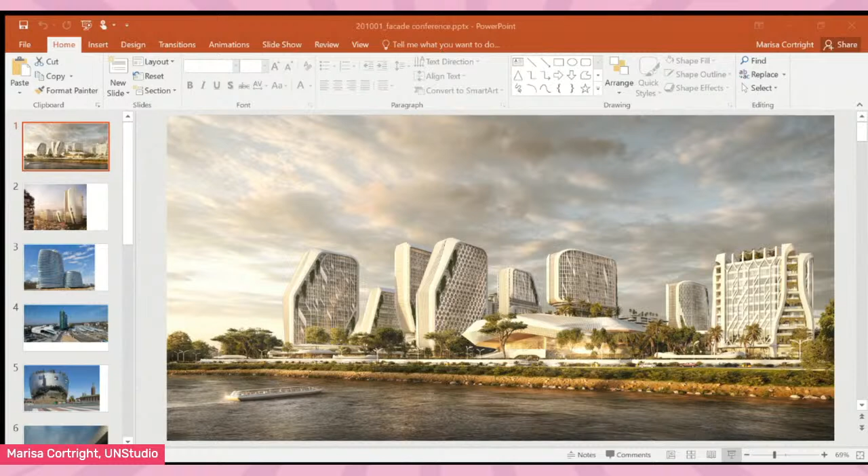We have got a glass box, which is the first skin, created for an inside-out experience. One should appreciate the fact that most commercial office buildings have an occupancy density of not less than 100 square feet a person, and some offices are as dense as 70 square feet a person. When you have so many people working out of an office space, the inside-out experience - what you can see from inside your office to the outside - is very important. So we decided as a team that the first skin has to be as transparent as possible.

Now, when you do a transparent facade, you always have to fight the forces of nature, basically the sun - we have the heat indexes, re-radiated heat. So that's when UNStudio came back and developed the second skin concept. Putting together the first skin and second skin, we are able to address the building's aesthetic appeal, make it a landmark development, and also honor all the requirements of climatic factors. So that's in a nutshell what Karle Town Centre is.

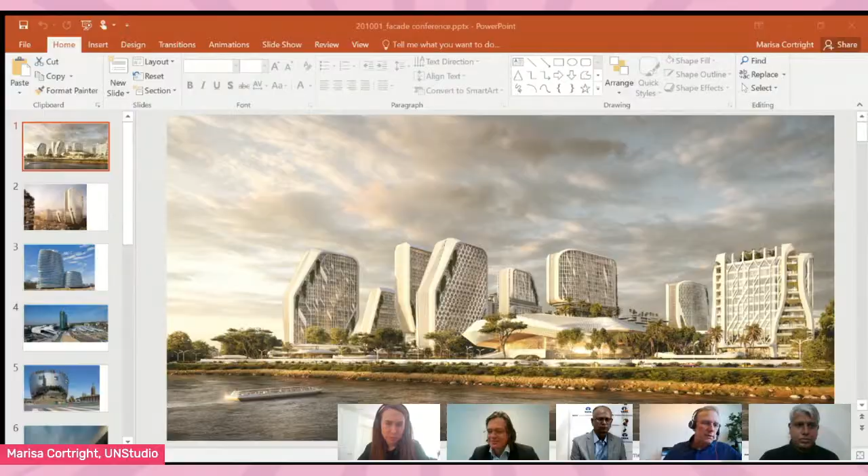I will explain a little bit more about Sorba, because we started working on metal facades. We first concentrated on producing aluminium cassette facades or stainless steel cassette facades, these kinds of facades. At that time we also looked at some other projects, but always in metal - cladding to tunnels, cladding to an underground station, cladding to bridges or whatever.

This was also the time we came in contact with UNStudio and looked at their first project, in the city of Arnhem in the eastern part of the Netherlands, where they had a tunnel to clad with a stainless steel mesh. This was the first time we came in contact with UNStudio, and we also saw their whole master plan for the city of Arnhem, for the railway station area. This was an incredible design, of which we thought, as Sorba, in 1998 or 1999, wow, this is all incredible. It would be nice for Sorba to stay with these guys from UNStudio and produce all these types of claddings required for this whole master plan.

And now in 2020, I can say that we were able to stay in contact with UNStudio, but also we stayed in contact with all the contracts that were given to the market. We won all of them, and we produced so many different kinds of claddings in this area, like the facades. Exactly, this picture is a nice picture.

We started on the two buildings in the center, where we did the complete facades, glass, aluminium cladding, etc. Later on, we did the canopies on the platforms, which you see on the right-hand side. We did complete canopies, glass and aluminium composite panels, including substructures.

Then finally, which is really the masterpiece in my eyes, is the cladding of the roof. We did the external facade of the roof, the watertight layer, the insulation, the airtight layer, and also the GRC panels on the roof, as well as some internal GRC claddings.

All individual, all unique panels, I mean, on the roof, about 1,100 unique panels in size and shape.

Incredible nice project, which also was for Sorba really a push in the development of the software we work with, and also the way of installation of these kind of heavy panels. This also brought us in contact with much more complex projects in London, for instance.

But also, through these projects, we could look at other projects. Most of them are always in Germany, Netherlands, or the UK. I think a nice example is one, Marisa, the IBG project in Groningen, which we also did

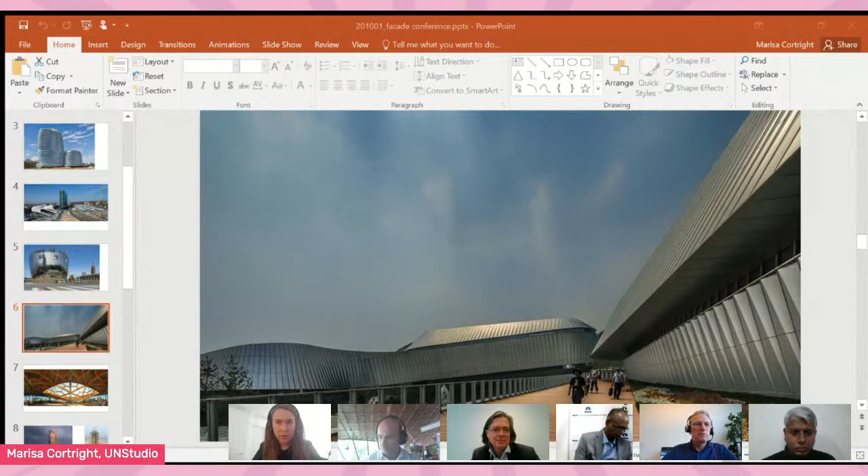We could make this out of steel, we could make it out of concrete. But when we were sitting there with the client on a terrace having dinner and looked at a bridge in Tbilisi, we saw a beautiful wooden bridge. And when the client told us that bridge was actually manufactured by a company from Kutaisi, where our airport was, the only thing we wanted to do as a team was go to that manufacturer and talk first with them to see if they could manufacture our building.

When we were there, we could immediately see together with their team that they could handle a project like this, which means we literally changed our design and made sure we could create a wooden main structure that could service the project. I think our challenge with every project is what we call reverse engineering - finding the manufacturers to make sure we can build these projects.

Looking at the project we're now doing with the team of Senoj, our challenge is also how to create this project in India. But also, we know there's a big challenge worldwide - we have a climate crisis, the Paris Agreement, and we've agreed the world should not get warmer than 2 degrees. India also signed up for the Paris Agreement and is working on that challenge, as are so many countries. The question is, what can we contribute as architects and engineers to this challenge?

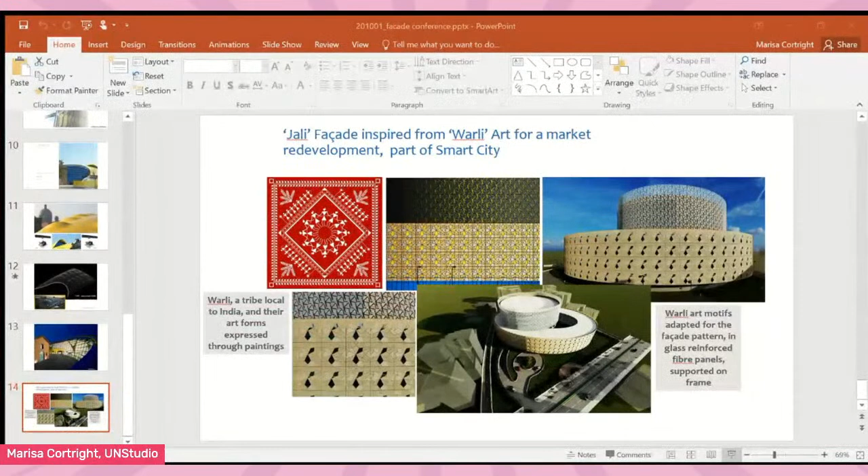But definitely, if I talk about the challenges that we face when we do projects in India, one of the challenges is the climate itself. We have variation of climates throughout the 12 months. We have a lot of issues with pollution at some places.

The other aspect which is not that tangible is the culture of the people, the thing where a project needs to become identified, where people can identify themselves. You cannot have a project or a facade which looks alien in that particular setting. So that is a major challenge we face.

And in smart cities, what we have tried to do is, wherever we have done the work, we are doing almost more than 10 smart cities right now, in various parts of India. So if I am talking of a smart city in South India, versus a smart city in West India, we do try to see that we bring in some part of the culture, the motifs, the local flavor to our elevation.

So what I am showing you here is a market which we developed, or are in the process of developing, in West India, and this is one of the options that we did. What you see on the extreme left hand side is an art form of a tribe which is quite famous here in India, the Warli tribe, very famous for paintings which they do with their own homemade paint, not artificial paint, made with vegetables and things like that. They manufacture this paint, and these art forms are very famous.

I will just say some words while we are waiting for the image to come. This has been a very challenging design where we've been working hand in hand with UNStudio as technical planners in charge of engineering, facade, and MEP, while UNStudio has been in charge of the design. I would like to catch up on what Gert was saying about making performance visible—that was a very interesting part of this work. The skin was, of course, a very relevant aspect of it, and we had the request from the client to build a sustainable tower, 300 meters high.

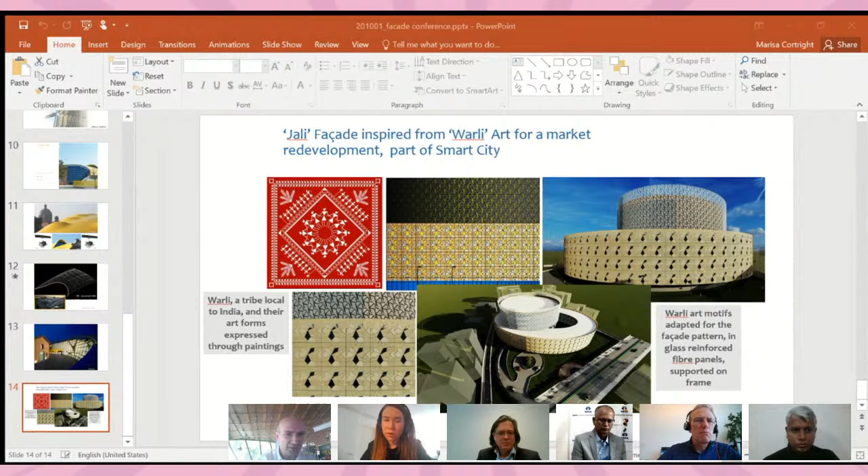So it's about a 300-meter tower, and the scheme is of one very relevant element. It was a relevant aspect from UNStudio's side to have this torsional movement, the so-called torso. From our perspective, it was very interesting to develop a solution allowing us to get as much natural light as possible. This is also a sustainable choice, because then you don't switch on lights and you get a better feeling—it's healthier. At the same time, we have to block too much heat from coming inside. We're in the Middle East.

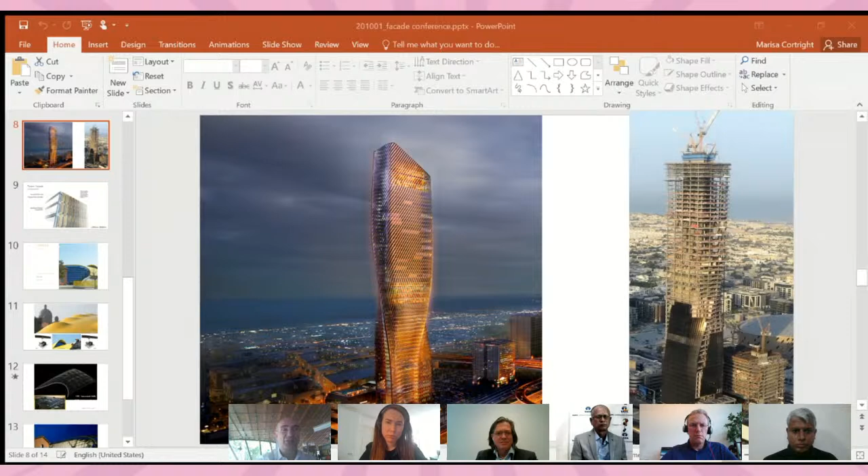Just to keep on the introduction of this project, in a way it's about working closely with contractors on making a vision and design possible in different countries, and moving back and forth between working on competitions at early stages and working on late stages of complex schemes. It allows us to cover the overall range, and it's a rich process, because then we get back to competition stage and we know what's working on site, what the issues are, and we can be more focused. Since we are involved in the early stages, when we are on site, we know very well how the design team is thinking, and this is helping find a proper synthesis.

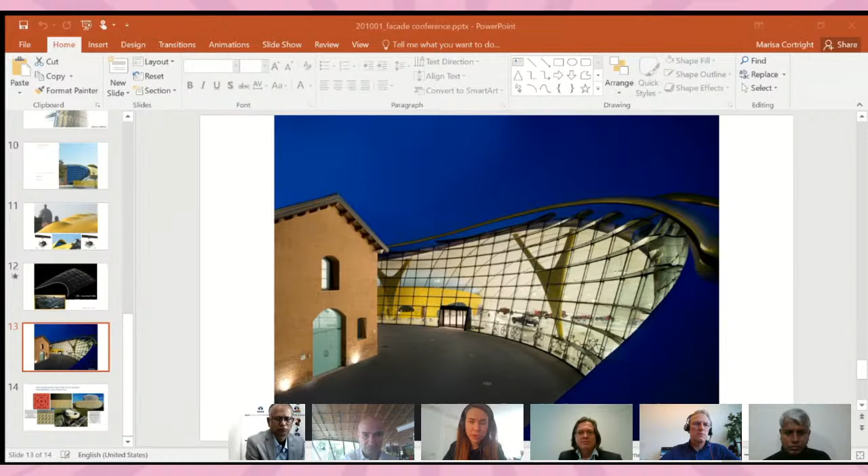I do want to return to the question of construction systems—based on the markets we're working in and the particular methodologies available to us in those markets, how do we make decisions? Especially, as Gerard mentioned, with all the different crises we're facing today, from climate crises to the pandemic and the ensuing economic crisis, these decision-making processes of how we choose the pros and cons, for instance, between unitized facade systems and stick systems—how do we make those decisions? I'd like to bring it back to KTC and ask Sinoj and Ger to reflect on what that decision-making process looked like in the KTC project. How did you decide based on labor conditions on site, on costs in the Netherlands, for instance? What kinds of factors came into your decision on what construction system to pursue?

Sinoj is still on mute, so perhaps I can start. I think that before we started to talk about the construction system, our first challenge was actually to look at the requirements of the client. Within the Karle company, one of the owners of the firm, Druva, actually had a vision—his vision was really to make a new type of project that would strengthen the cultural parameters, but also bring something new, something you could be proud of instead of being ashamed of.